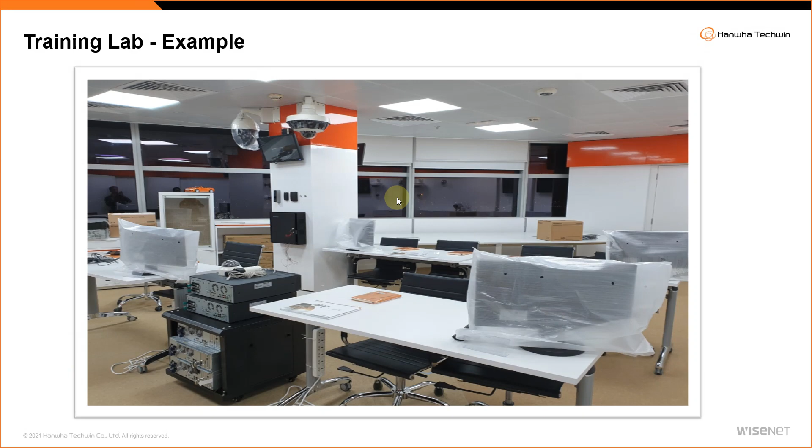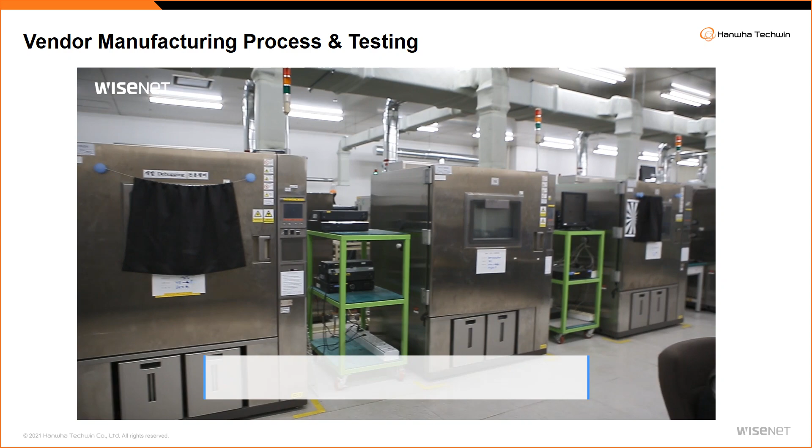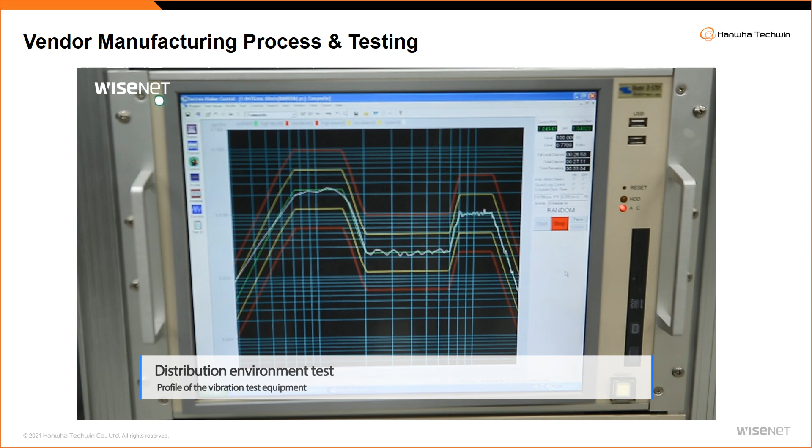Quality and reliability testing process. This is just a video to show you the different tests a particular vendor does, and you can ask for them, by the way. You can ask for the report. Drop test: during transportation, when they throw the cardboards, will the equipment be in the exact same position as it left the factory?

Power test. What if you give the wrong power? Will the camera fail or will it still withstand? Is there any surge protection? That can happen - just because you inserted the wrong power, the camera should not blow up, forcing you to return it and deal with the headache and delay to the project.

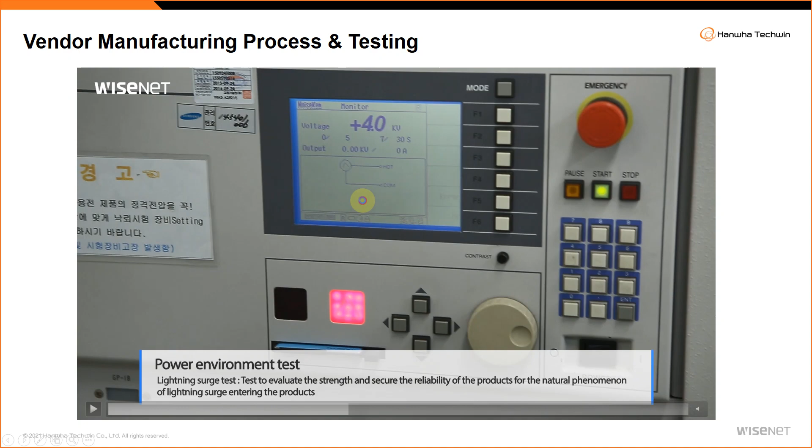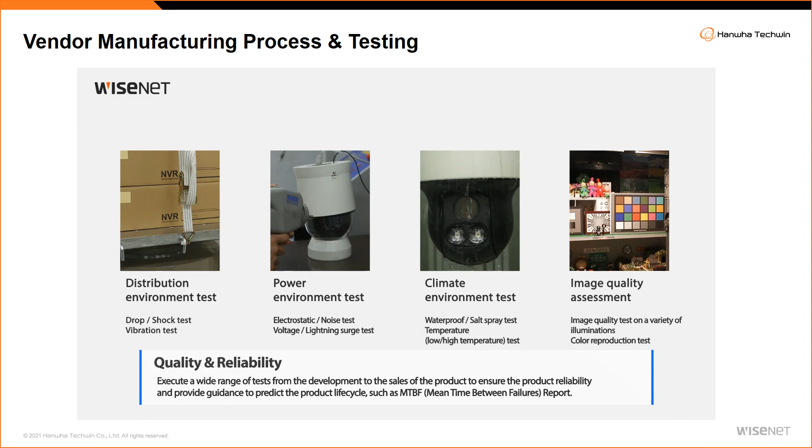These are certain things which they do. Next is HALT test, ALT test. What if the temperature increases? What if the temperature continuously increases from morning till afternoon, with a steep increase? What happens? What is the breaking point? What caused the issue in the camera if the temperature keeps on increasing? These are the HALT test, ALT test.

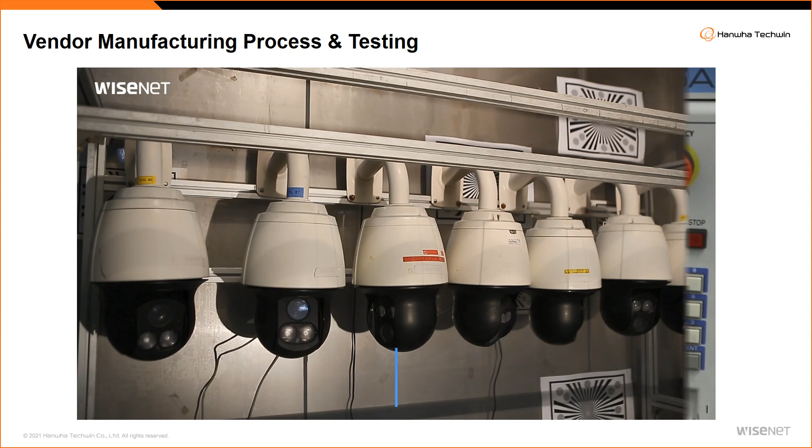We always think temperature increases, okay, camera can have issue. What if humidity and temperature occur at the same time? What if different factors occur at the same time? This is called accelerated life test, and then the next one is HALT test—multiple scenarios, what if different things go wrong in a camera. These are the different tests they do.

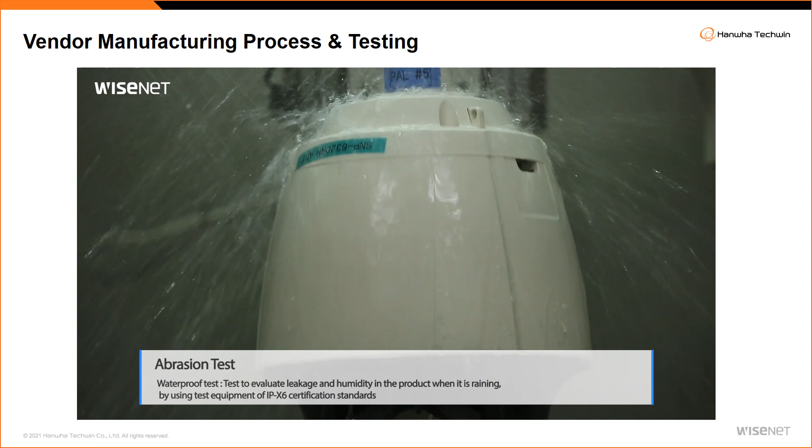Then, of course, waterproof test. Then handling test—how many times you keep operating the same thing. Then, of course, image quality test. Does it produce the actual color? Does the sensor produce clear distinction between different colors and so on?

You can always request a vendor and say, I want to have a look at this testing lab. But yeah, it requires you to travel to that factory and check. So you can inquire about this depending on your project.

References you can look for: specific vertical references, hospitals, commercial centers, exhibition centers, because there are certain small factors which are slightly different. So you can have a look at a vendor whether they have references in that field—it can be in that country or in another region.

Now comes the next part where we talk about the camera and what makes a camera. If you look closely, there are many components that make the camera.

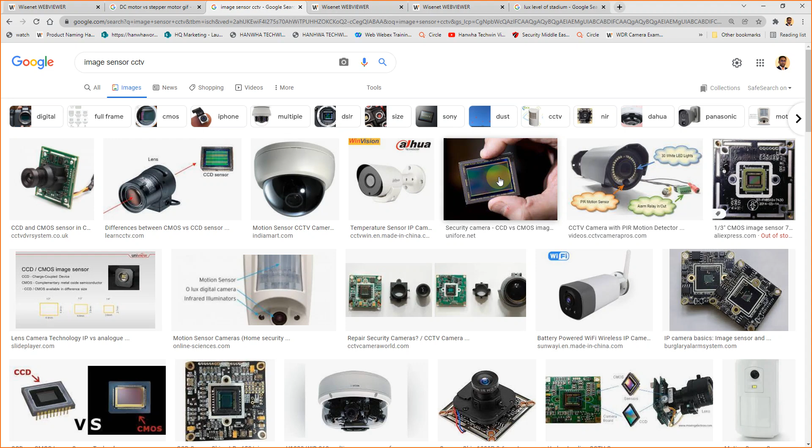1 by 3 inch means smaller. This is a very good picture - if you remove the lens, you can see the image sensor inside. So the smaller the sensor, like 1 by 4 inch, the smaller the area. 1 by 3, 1 by 2.8 are the standard. 1 by 4 is actually small and will have poor quality. 1 by 2 will have very good image quality at low light.

Having said that, there are two factors we improved: one was the lens f-stop, second was the image sensor. You can take many low light cameras - this is where they will focus to make sure to give a good low light image.

They are slightly expensive because you're using a premium sensor and a premium lens, something above the standard requirement.

What is the benefit of low light? You don't have to increase street lighting to get a color camera - that's more expensive. You don't have to invest in more lighting to get a color image. You can just buy one camera to monitor that entire scene with low light, giving you much better cost savings compared to investing in more lighting.